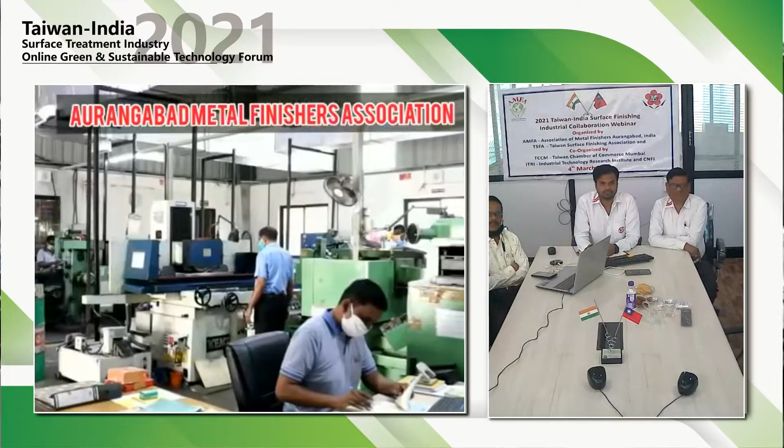The growth in the industrial sector in Aurangabad started in the mid-80s. It has continued till today, showing no signs of slowing down, with the prestigious DMIC project coming up in the Shendra-Bidkin industrial area, which has a land bank of over 10,000 acres. Thus, this is the ideal place to invest in, with the best of infrastructure maintaining a balance between nature and

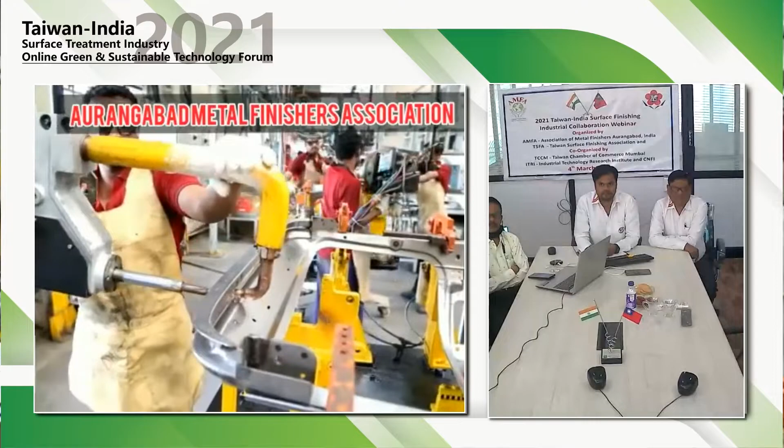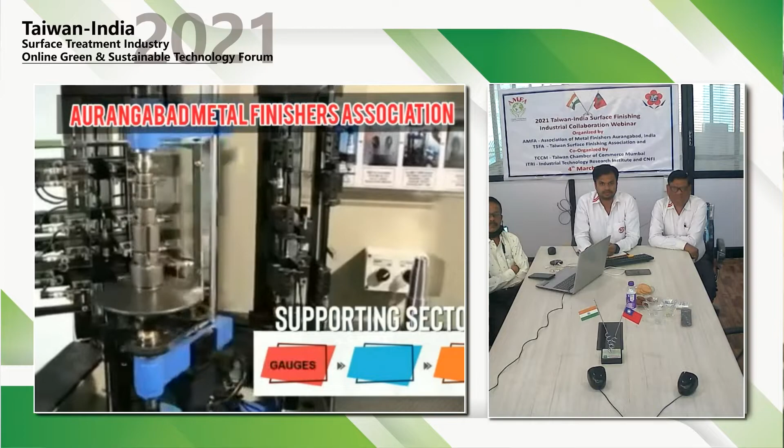industries. Today, this city is home to automobile sector giants and many well-known brands from the auto component sector. The supply chain is very well established with all Tier 1, 2 and 3 vendors keeping up with the best of industry trends and benchmarking, which helps them stay competitive. Almost all automobiles built in India have had some contribution from Aurangabad. The city is also host to well-known brands in the related supporting sectors like machines, SPMs, tools, gauges, fixtures and work holdings, etc.

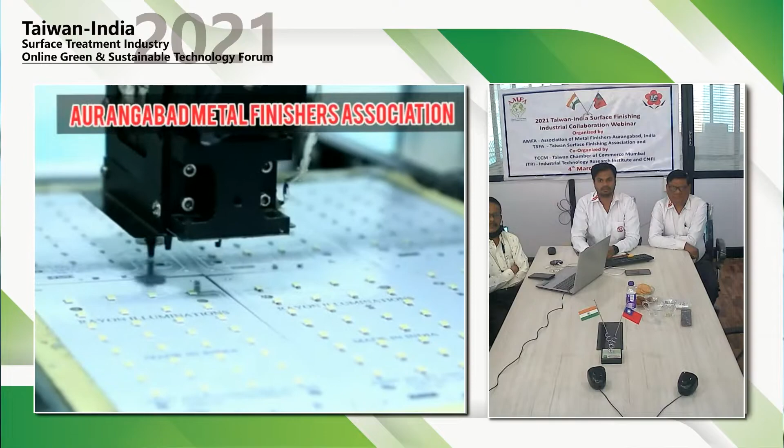Aurangabad is also home to many leading pharmaceutical companies, breweries, plastics, seeds, foods and consumer durables, along with new entrants in the field of IT and electronics. Now we move towards our association.

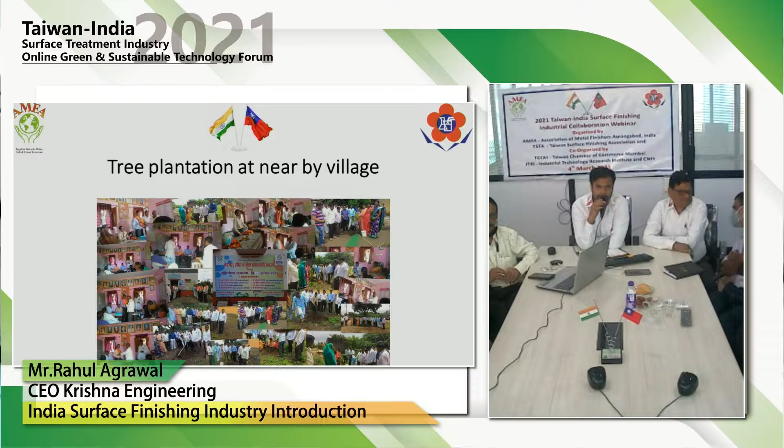We have done 106 tree plantations near our villages. Technical seminar by Growell, where we learn what next and what in future we can do in chemical industries. And also in this pandemic situation, we have contributed a handsome amount for relief. These are some of the moments from our first installation. Our ETP plant visit in Pune. A visit to the Growell R&D Center. Tree plantation near our village. Technical seminar by Growell India.

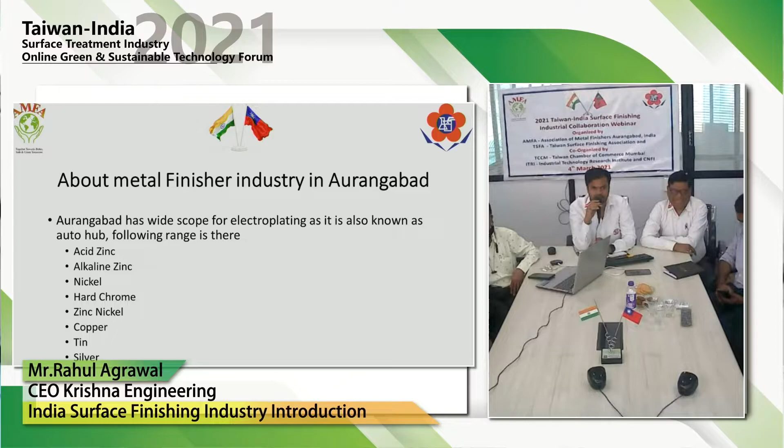Now, this is our metal finisher industry in Aurangabad. As we have 45 active members in our Aurangabad industries, these are the plating facilities which we have in Aurangabad: acid zinc, alkaline zinc, nickel chrome, hard chrome, zinc nickel, copper, tin, silver, and many others.

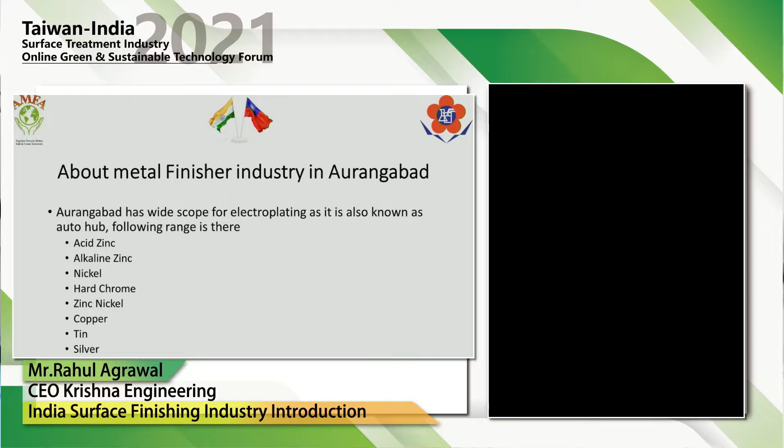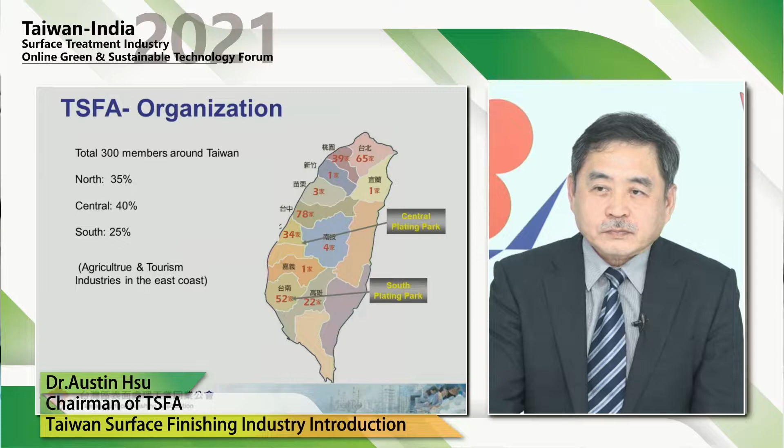Currently, we have 300 members around Taiwan, about 35% located in the north, about 40% in central Taiwan, and about 25% in the south. Because of geographical factors, on the East Coast we mainly have only agriculture and tourism. And here is our organization. This is a nationwide association. We have 4 offices around the island in order to provide service to our members and to communicate between members, industry, and government.

Our vision is to help our industry to become one of the top leaders in process and material application in surface treatment technology. And this will be beneficial to all the human and environment. Our mission is to support our industry to grow and improve continuously and help to become the best service provider to the world.

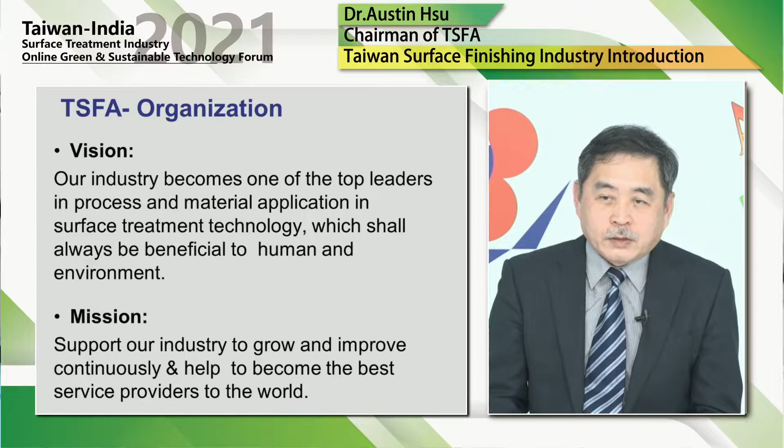I will summarize TSFA's role in this slide. You can see the interaction among members, TSFA and the government. We provide service to our members and support them to promote their technology or business. We organize exhibitions, forums, and education programs. And every year we collect consensus of the industry to provide to government for their policy decision. So this is the main role of our TSFA.

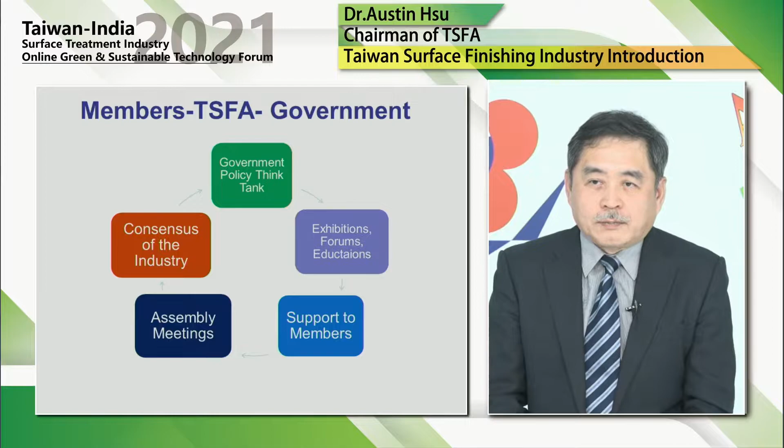Next, I will brief the current status of our surface finishing industry in Taiwan. First, the average revenue of the surface finishing industry is about 30 billion NT every year. And around the island, the total employees engaged in this industry is about, no, it's about 31,370, I think.

And we have total 1,400 shops around Taiwan. Most of our members provide process to their customer, and this we call process value added service. And the customers are directly from Taiwan, so about 90% of the customers are domestic. And from the scope point of view, most of the plating shops are small or medium operations.

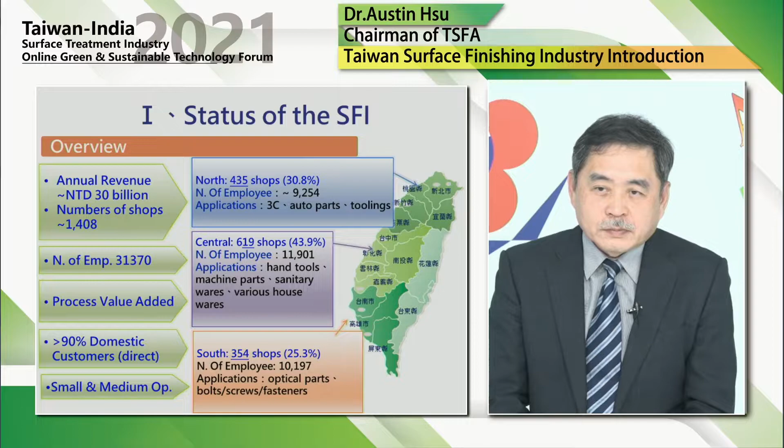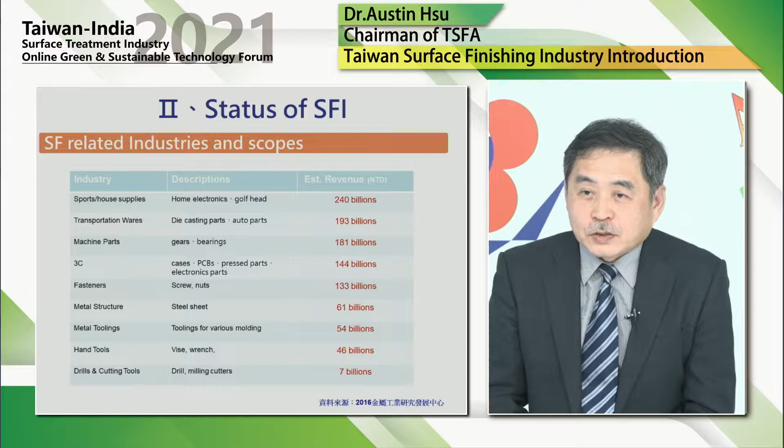We summarize the features of Taiwan surface finishing industry as the following. First, most of the operations are small or medium. Most of the platers provide only service without integrated complete products. When we visit the plating shops, we find the engineers are very skillful in providing what the customer demands. When a customer comes to the plating shop, the engineer can always design and rearrange the plating parameters or manufacture different kinds of plating machines to meet the customer requests.

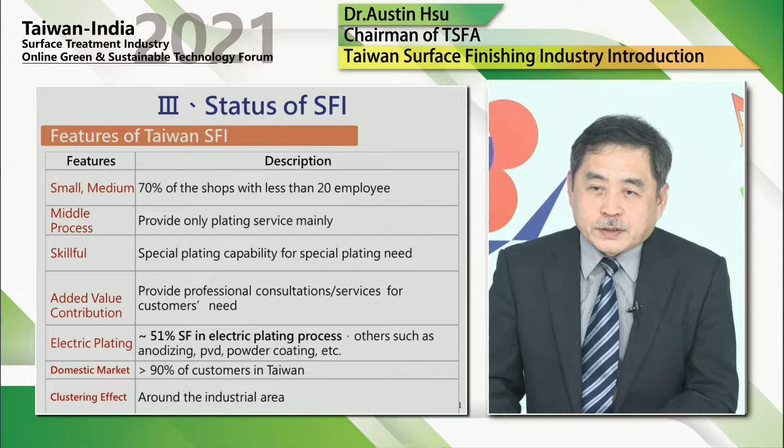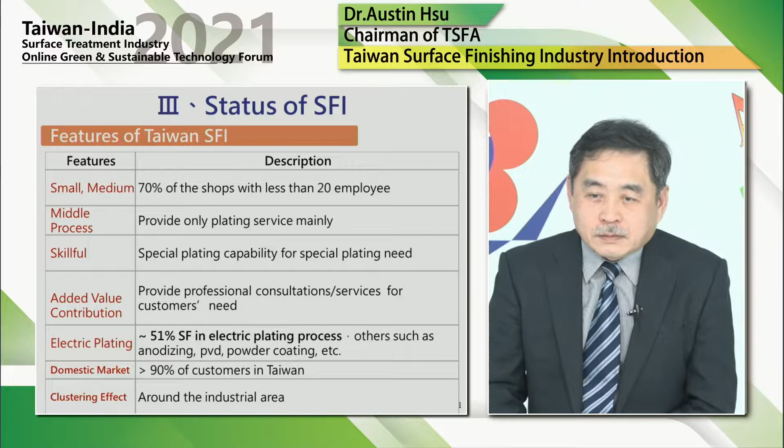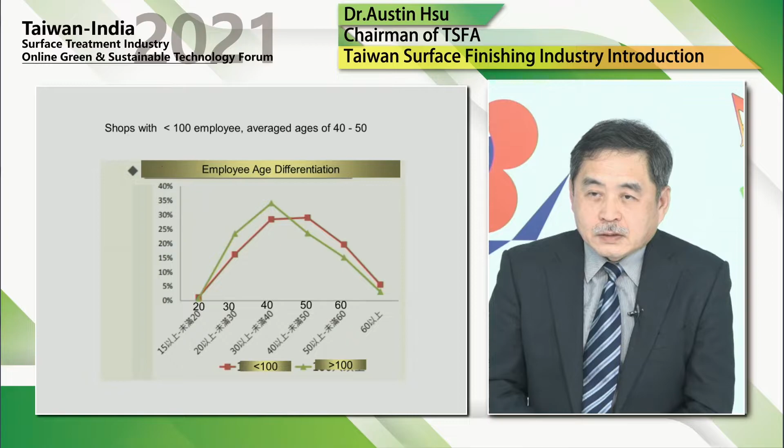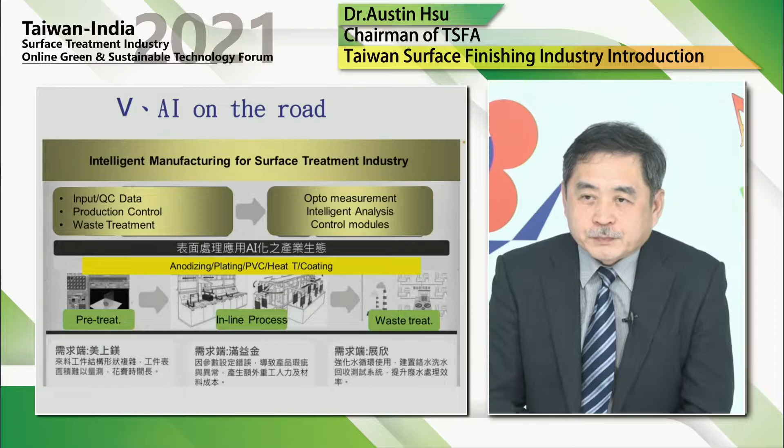So I really cherish our new relationship with EMFA. I believe we can work together to achieve these new goals. Thank you very much.

Okay, thank you, Dr. Hsu. Thanks for the very informative sharing. And next is a video from Mr. Brandon Lloyd. He's a Global Product Manager of Atotech. He will share with us about sustainable cleaning and degreasing.

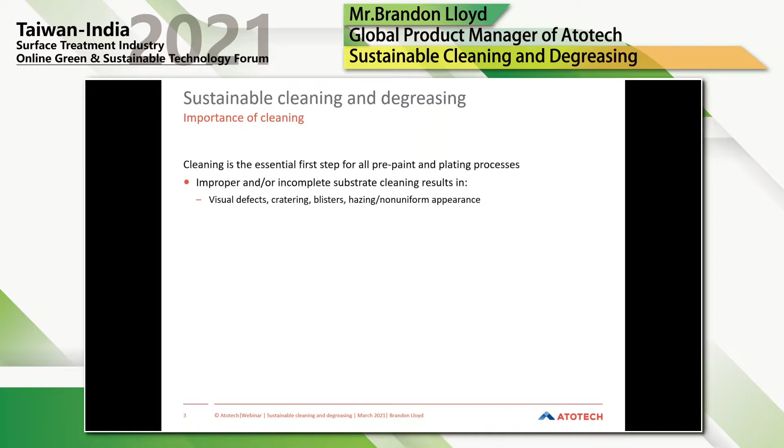So to start, let's first focus on the importance of cleaning. Cleaning is really the essential first step for all pre-paint and plating processes. Improper or incomplete substrate cleaning can result in the following issues: visual defects such as cratering, blisters, hazing or non-uniform appearance, whether we're considering painted parts or plated parts.

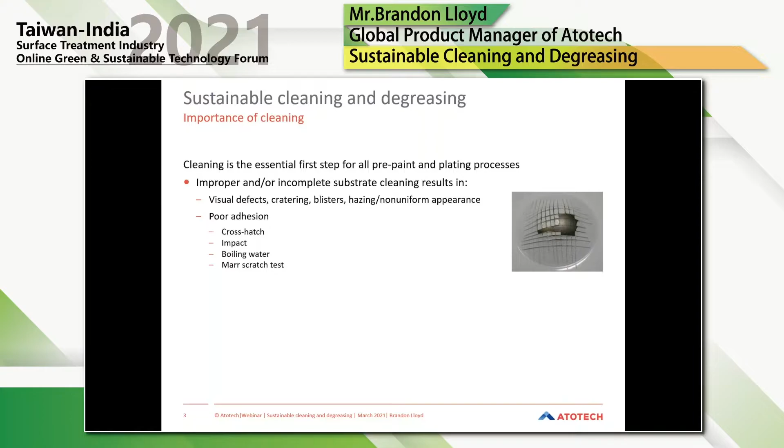Poor adhesion, through crosshatch, impact, boiling water, mar scratch tests, or any number of other tests as well. It can also result in poor corrosion resistance. Here we consider normal tests like salt spray, whether it's NSS or CASS, cyclic corrosion evaluations, and filiform tests. And these rejects lead to costly rework and production inefficiencies.

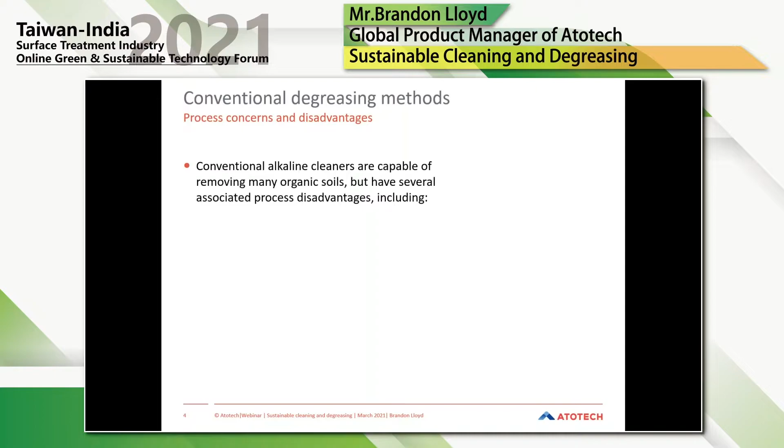So some of the process concerns and disadvantages of conventional degreasing methods. Conventional alkaline cleaners are capable of removing many organic soils, but have several associated disadvantages. They typically operate at high temperatures, somewhere between 55 to 80 degrees Celsius. What comes with that is a high associated energy cost. Additionally, it can have a high associated carbon footprint.

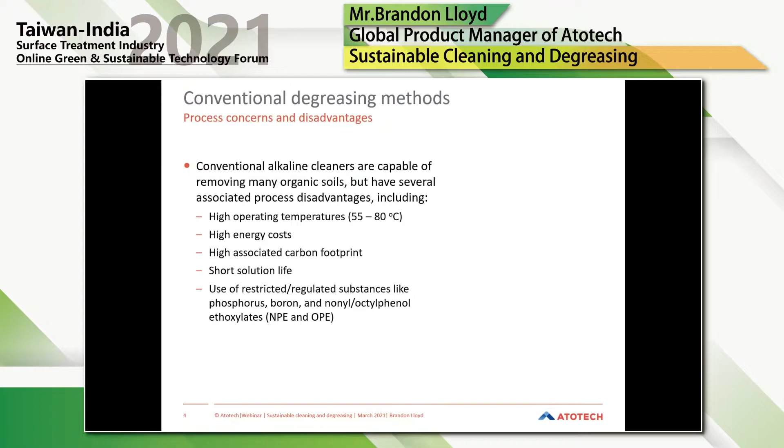The solution life is often relatively short, and sometimes they use restricted or regulated substances like phosphorus, boron, nonylphenol, and octylphenol ethoxylates. All of these substances have seen increasing regulation over the past few years, specifically in the EU, but we're starting to see a lot more around the world as well. As the organic soils are removed from the substrate surface, they become emulsified in solution, leading to a gradual decrease in cleaning performance until the solution must be replaced.

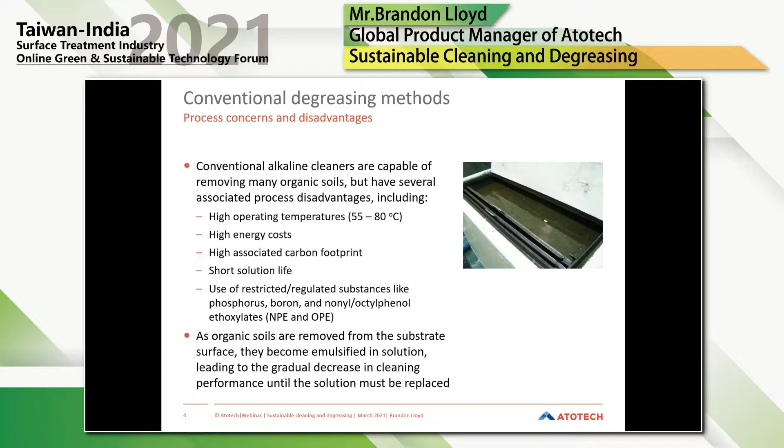So now we'll talk about some of the improvements to conventional degreasing methods that are available today. Atotech's approach to improving conventional degreasing methods really comes down to two important factors, long life and low temperature. First, we'll focus on long life aspects.

Some of the advantages that this offers is a stable cleaning performance throughout the usable life of the cleaner, and less frequent cleaner makeups, which have several associated advantages. There's chemical savings, reduction in waste, labor savings, meaning that there's less maintenance required, and so less time is dedicated to the tank dumps and maintenance of the system itself, and then an increase in overall plant productivity.

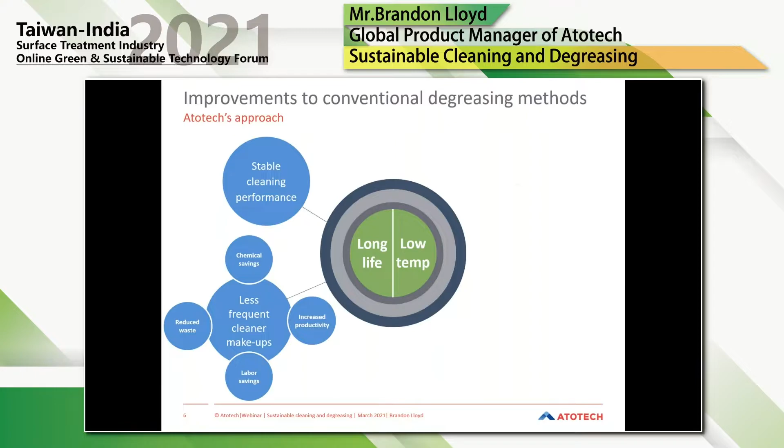Now, if we focus on the low temperature aspects, one of the primary benefits, of course, is energy savings. There's also the reduction in emissions. And lastly, it's offering a safer work environment for employees, especially when we're considering chemistry that is using less regulated substances and also operating at lower temperatures.

So, process description of Uniprep long life, low temperature cleaners. The Uniprep cleaners are specifically formulated to function at low operating temperatures. The part is degreased utilizing a cleaner with a highly emulsifying surfactant system. These emulsified oils are then degraded in situ, meaning inside the cleaner system itself.

The surfactant molecules that have helped emulsify the oils are then made available to emulsify additional oil introduced through the cleaning process, resulting in this long life cleaning system. The degradation of the emulsified oils occurs continuously over time and is really one of the unique advantages of Uniprep long life, low temperature cleaners.

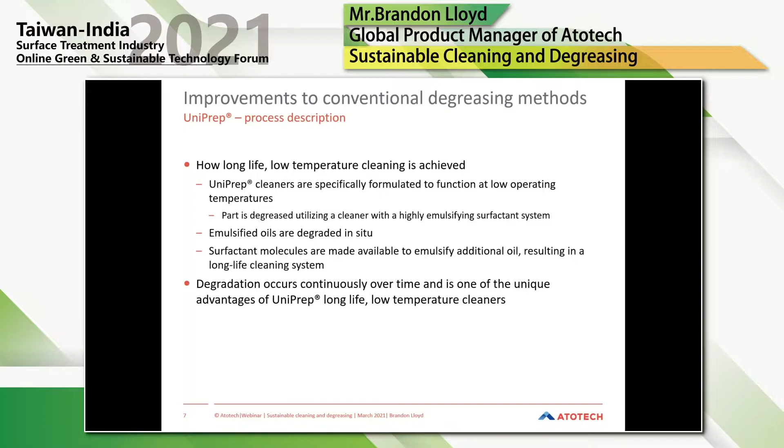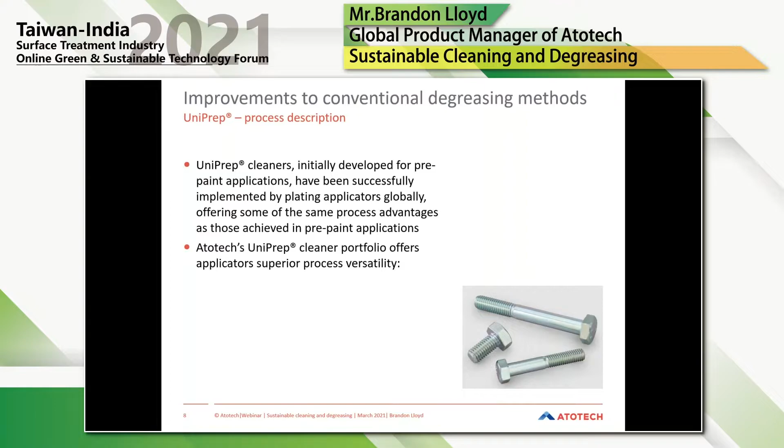Uniprep cleaners were initially developed for pre-paint applications, but have been successfully implemented by plating applicators globally, offering some of the same process advantages as those achieved in pre-paint applications. Atotech's Uniprep cleaner portfolio offers applicators superior process versatility. These specialized cleaners were developed for both spray and/or immersion applications.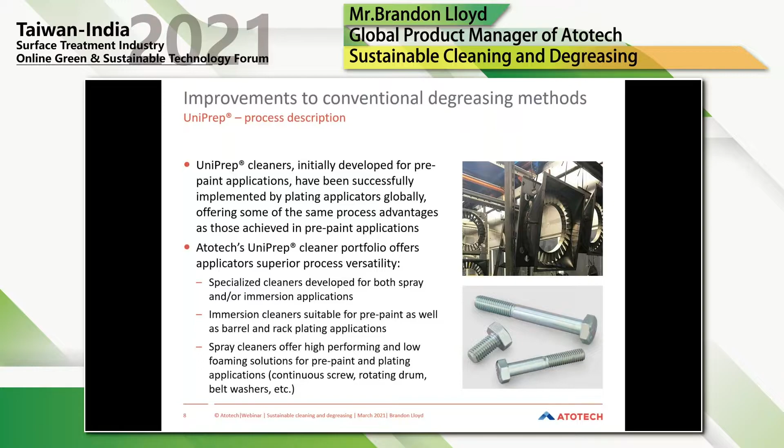The immersion cleaners are suitable for pre-paint as well as barrel and rack plating applications. Our spray cleaners offer high-performing and low-foaming solutions for pre-paint and plating applications. For plating applications that would require spray cleaners, we consider systems like continuous screw, rotating drum, belt washers, and any other number of spray systems utilized by plating applicators today.

So now we'll focus on some of the process benefits. The low operating temperatures result in substantial energy savings. In some of the following slides, we'll discuss some of the economics of this. The long life benefits of UniPrep cleaners and degreasers include increased productivity, waste treatment savings, reduction in COD and FOG, which is important for wastewater treatment operations and effluent, chemical consumption and cost savings.

We typically see in greater than 98% of our applications that the UniPrep cleaners are able to achieve a 2 times bath life extension in comparison to conventional cleaning. However, many of our customers have realized a 3-time or 4-time increase in cleaner life compared to conventional cleaners, and sometimes even more, which we'll discuss later. Lastly, it's supporting the maintenance of stable performance throughout the cleaner life, providing consistent results while minimizing the possibility for part rejects.

If we consider a conventional cleaner, the performance decreases as a function of the emulsified oil content in the solution. If we look at the diagram at the bottom of the slide, you can see that over time, as the amount of oil increases, the cleaning performance will gradually decrease, finally to a point where you must dump the cleaner and replace it. And then the cycle is just replicated over and over.

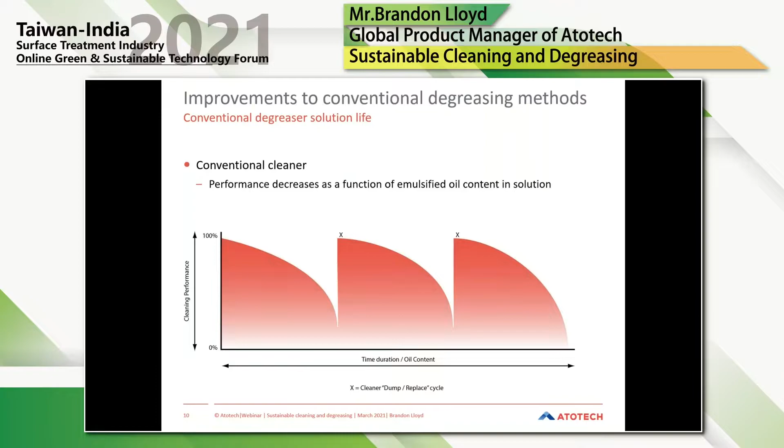If we consider UniPrep long life low temperature cleaners, the performance is going to remain consistent throughout the cleaner life due to the degradation of emulsified oils. Of course, there will be some gradual decrease as the oil content starts to increase slightly in the cleaning solution, but what we see typically is the cleaning performance is quite stable throughout the entire usable life.

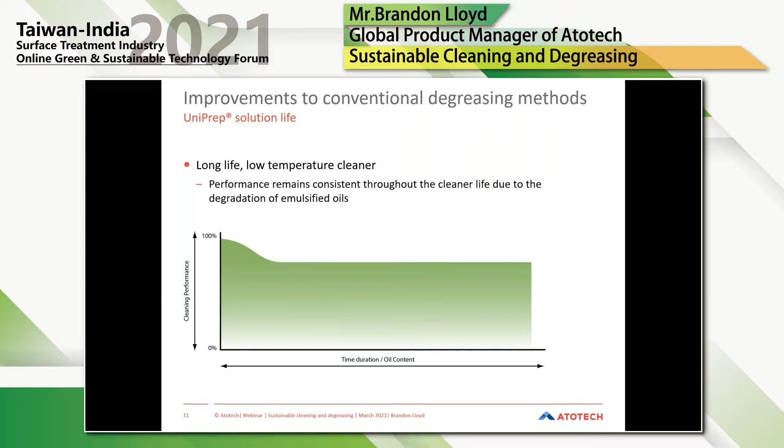We've conducted controlled laboratory experiments to show how oil levels can be reduced by as much as 7 times in our UniPrep cleaners. If we look at the diagram, the image on the left shows 2 graduated cylinders. The one on the left is a conventional cleaner, and you can see the oil that has separated out from the cleaner itself. For the UniPrep cleaner, the graduated cylinder on the right, the amount of oil is significantly decreased.

Another way to visually see this is with the 2 images on the right side of the page. The conventional cleaner shows the oil sitting on the surface of the cleaner tank itself. With the UniPrep cleaner, the amount of oil is significantly reduced compared to the conventional cleaner.

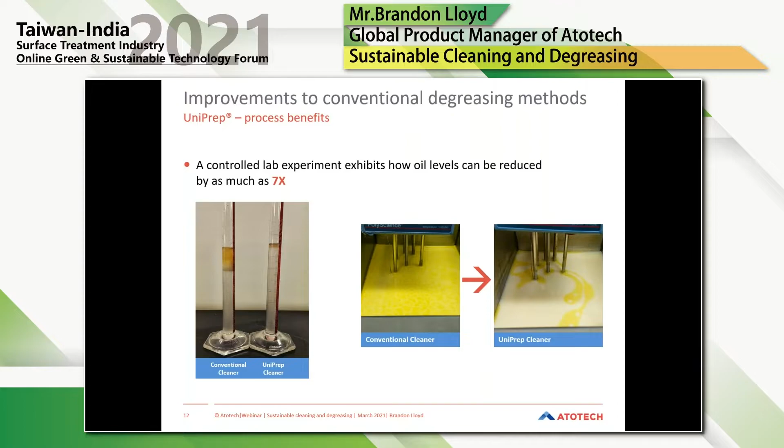Now we'll discuss some cleaning quantification tools. A key component of long life, low temperature cleaning is being able to quantify that adequate substrate cleanliness is being achieved, both prior to and after implementation of the process in production. There are several simplistic methods like white glove or white tissue tests, as well as water break tests that can give you some indication of substrate cleanliness. The images on the right side of the slide exhibit these specific tests.

If we consider some of the advantages of these tests: first, they're non-destructive, so they can be conducted on production parts. They're very easy to conduct and relatively inexpensive. The disadvantages, however, are that the results cannot be quantified - it's really only a visual inspection. They are dependent on the inspection quality and the inspection personnel's skill.

For certain pre-paint and plating applications, a more sophisticated evaluation is really required to ensure that the subsequent coating is not compromised. Going back to the first slide where we talked about the importance of cleaning, this is really the key first step in ensuring your final part quality.

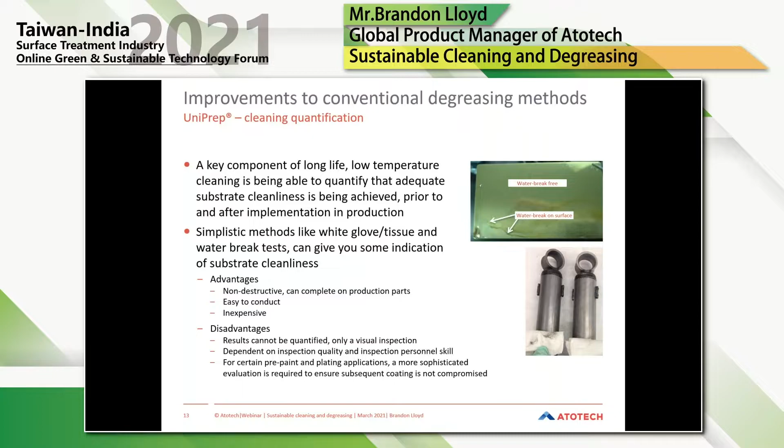Some of the more sophisticated methods aid in cleaning quantification better than the previously mentioned conventional methods. We have 3 specific methods that we consider within Atotech as we evaluate cleaners and degreasers. The first is auto deposition copper immersion.

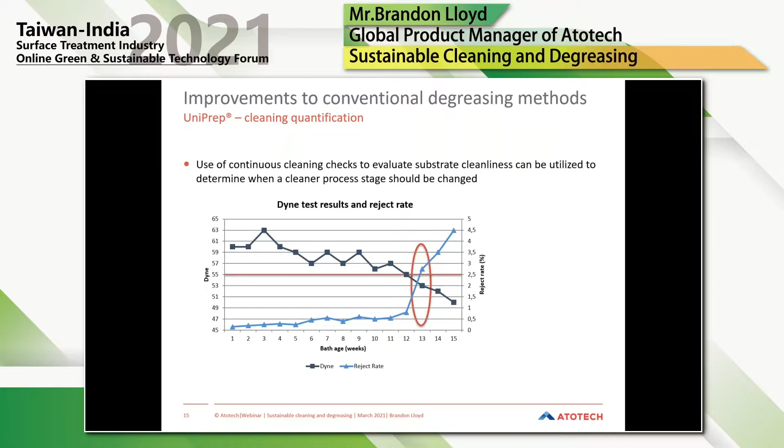Now let's talk about some of the economics of sustainable cleaning processes. So if we consider a conventional degreaser versus UniPrep long life, low temperature cleaning, in this application specifically we're going to focus on a spray cleaning application for pre-paint.

The customer is utilizing a 20,000 liter degreasing tank, using a natural gas boiler for heating the process stage, and their production volume is approximately 750,000 square meters per month.

For the conventional degreaser, the unit cost is X US dollars per kg, operated at 5% concentration, 55 degrees Celsius, with typically about a 20-day bath life. For the UniPrep cleaner, this has a slightly higher unit cost at 1.5x US dollars per kg, but is operated at 3% concentration compared to 5%, at a lower temperature of 35 degrees Celsius versus 55, and the bath life goes from 20 days up to 120 days, quite a big extension.

Looking at overall process benefits, first the chemical cost: with the conventional degreaser, the overall annual cost is about $200,000 per year. With the UniPrep cleaning process, this cost is only about $189,000 per year, offering a 5% savings, even though the UniPrep cleaner has a higher unit cost.

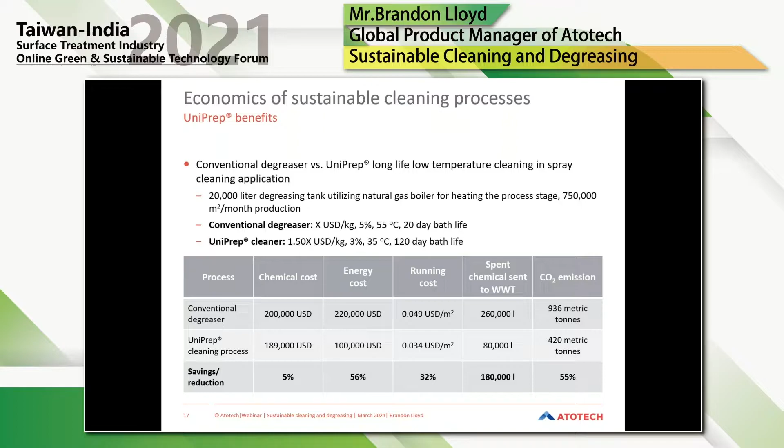So lastly, we'll go over some case studies. Case study 1 is an existing Atotech customer that has implemented UniPrep long life, low temperature cleaners into each of their 4 lines. The primary benefits they were looking to achieve were reduction in overall chemical consumption, process improvements in final part quality, and sustainability initiatives.

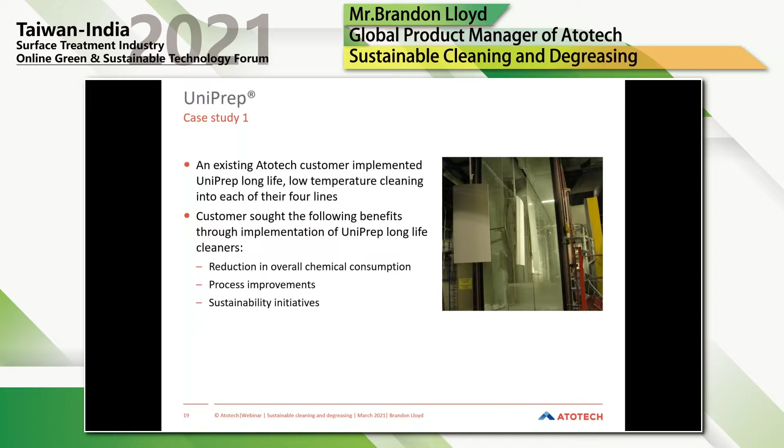With UniPrep implementation, they were able to significantly increase the bath life. We can see that in almost every instance, we were able to increase it by 2x. The total number of cleaner makeups eliminated annually was 14. In summary, there's a 128% cleaner life extension for all of the lines combined, and an 18% reduction in the daily cleaner replenishments. This is quite a big benefit in supporting reduced overall operating costs.

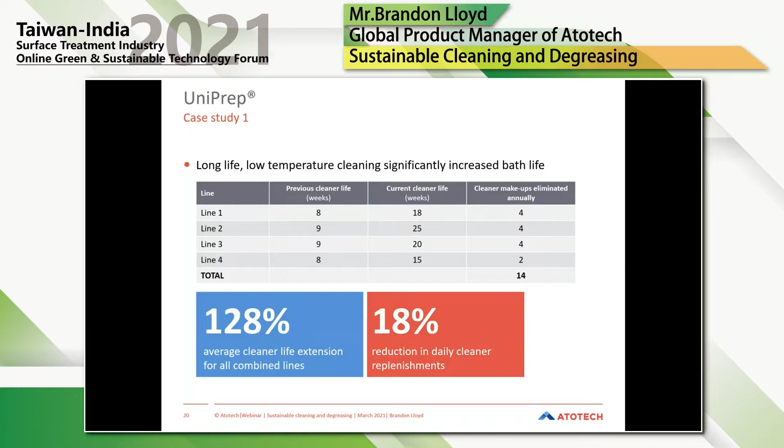In summary of the total benefits: from the cleaner dumps itself, the customer achieved about $28,000 US per year in savings. The daily cleaner replenishments reduced overall cost by almost $200,000 US per year. Additional benefits were achieved through energy savings, almost $45,000 US per year. Reduction in labor was attributed to $10,000 US per year. CO2 emissions were reduced by greater than 440 metric tons per year, and filter cleaning was also a key benefit, reduced by 65%. The total annual savings achieved through this customer was greater than $270,000 US dollars.

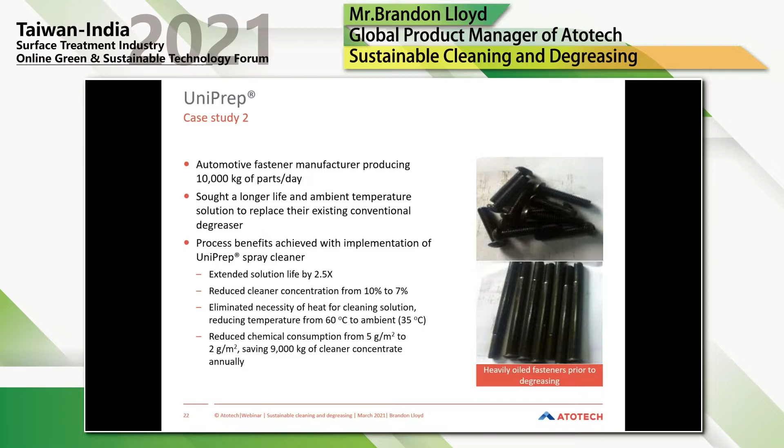Another case study I want to discuss is an automotive fastener manufacturer producing about 10,000 kilograms of parts per day. They were seeking a longer life, ambient temperature solution to replace their existing conventional degreaser. The process benefits achieved with implementation of UniPrep were: extended solution life by about 2.5 times, reduced cleaner concentration from 10% to 7%, eliminated the necessity of heat for the cleaning solution, reducing temperatures from 60 degrees C down to 35 degrees Celsius, and reduced chemical consumption from 5 grams per square meter to 2 grams per square meter, saving almost 9,000 kgs of cleaner concentrate annually.

Lastly, we'd like to highlight some of the other applications we've seen globally in plating with significant improvement in bath life through implementation of UniPrep cleaners. If we look at the table here, we can see many different examples.

The first one we see is an alkaline zinc nickel rack plating application that is able to extend their bath life by 4x.

The third instance is an electroless nickel rack plating application with a much smaller tank volume, which was able to achieve at least 2x. This can be extended even further since this installation only took place within the last year.

The last one we'll discuss is the acid zinc rack plating application. With a tank volume of 5 cubic meters, we were able to achieve a 20x bath life extension.

So we can see that in every application, what UniPrep offers the customer can be quite different. These customers, as a collective, serving multiple industries including automotive, fasteners, and general industry, have attributed many savings and process improvements to the implementation of UniPrep, including fewer rejects and longer bath life of other chemical stages.

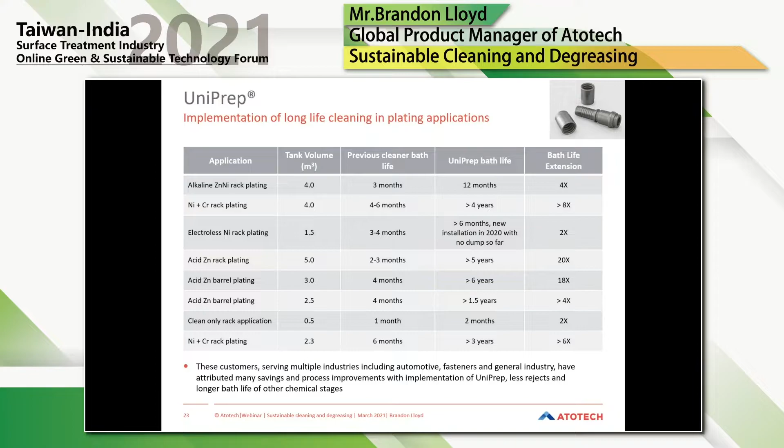So in summary, long life, low temperature cleaning processes can increase the overall sustainability of the pretreatment process, offering lower operating temperatures, longer solution life, increased total process savings, and stable operating conditions.

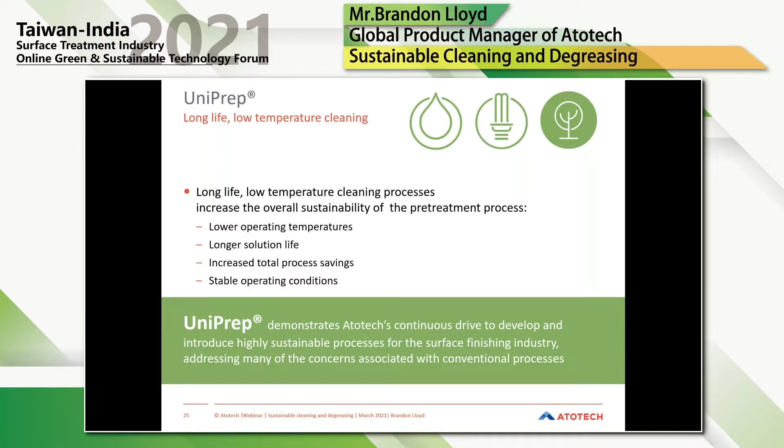As a collective, UniPrep demonstrates Atotech's continuous drive to develop and introduce highly sustainable processes for the surface finishing industry, addressing many of the concerns typically associated with conventional processes.

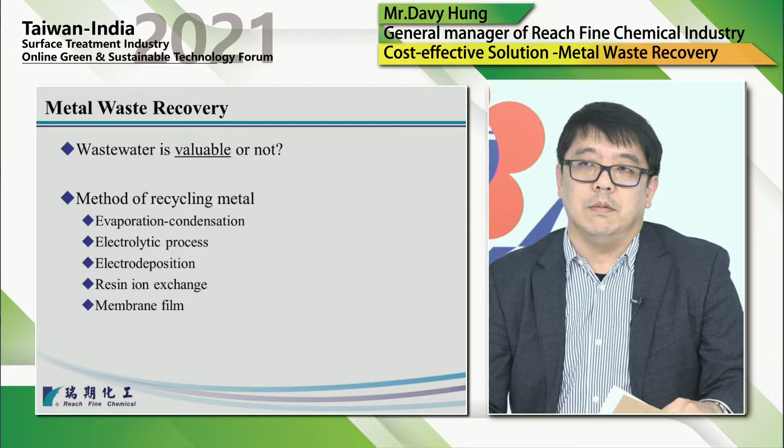The final one is the membrane film. This is mainly to recycle water first, and then you can get a metal concentrate and get it back for use in your plating line. So these 5 are the most popular common ways used in plating shops.

And then I'll go over our own system about recovering nickel. Our system is using ion exchange resin. And we chose these technologies because we want to selectively recover nickel from the plating line, and also we can recycle the water back to the line to use.

So we started to think either we can treat the wastewater or we can find a resource from the wastewater. So we chose to treat the rinsing water after the nickel tank, so we can get the nickel back into nickel sulfate solution. We can get about 99% of nickel recycled as nickel sulfate solution.

And because nickel can be isolated, water can also be recycled. About 85% of water can be recycled and back to the line. And it also can decrease the wastewater discharge.

And here, because we use ion exchange, I'll just briefly explain the mechanism. Here we select a special resin which has very high selectivity to nickel. So there are 3 reactions. The first, we call it adsorb. We use a sodium type of resin to absorb nickel, and then get the nickel type resin. And then we use sulfuric acid to go over the resin and then get the nickel sulfate solution.

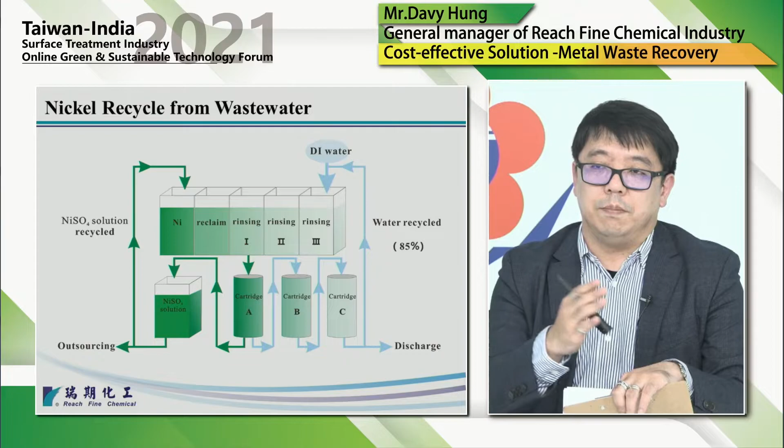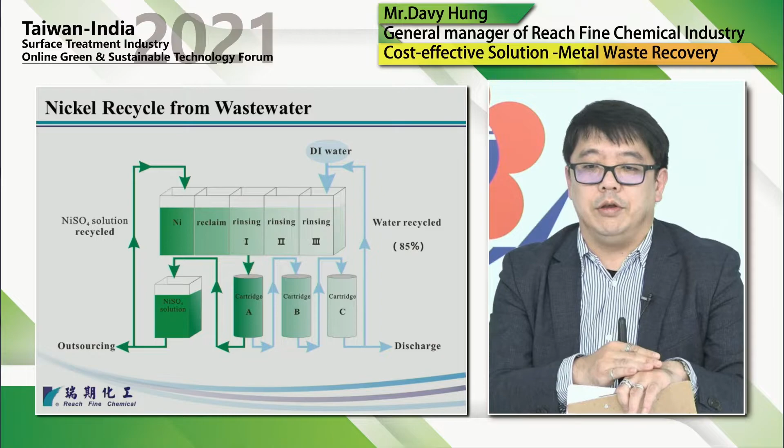So as a result, we get nickel sulfate solution and recycled water. On the left-hand side, we have the nickel sulfate solution, which you can use back in the plating line. Usually, we put it into a semi-bright nickel tank. On the right-hand side, we have water to recycle, usually used back in your plating line. Some plating shops use it back as rinsing water, or to make up the cleaner or post-treatment, and about 15% of water goes to discharge.

And here, our performance for this equipment is we can get very good quality of the nickel sulfate solution, about 260 grams per liter of concentration. So it's almost ready to use.

And then the water is good quality and can be used back either for your rinsing water or for makeup for cleaner. And also for wastewater, you can have very low content of nickel. For a few of our customers, we measured the nickel content in their wastewater after the nickel recycling process. The average is below 0.5 ppm, so it meets the regulations in most countries right now.

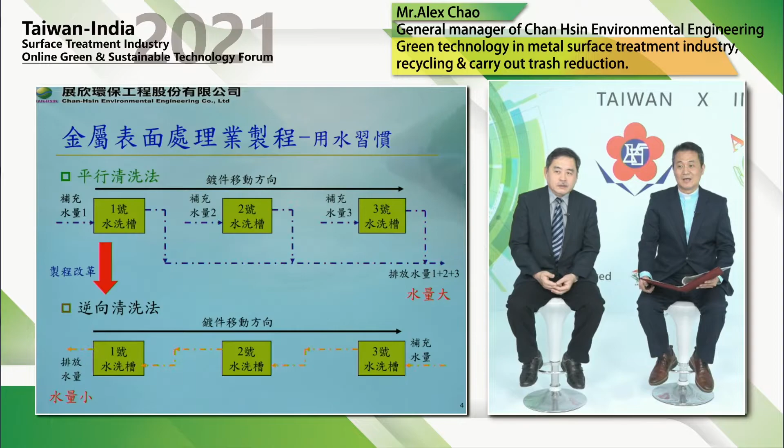Traditionally, in the cleaning process, the cleaning flow is parallel to the processing flow, so you input rinsing water from the beginning and follow through to the end. We call this parallel rinsing. This way generates a huge amount of wastewater.

And here we propose a new method of rinsing. We call it reverse rinsing, which inputs water from the back end to the front. This way, you can reduce a big amount of wastewater.

And in practical application, we evaluated that every year, if you use reverse rinsing, you can save about 16,500 tons of water per year, and you save almost 1 million NT per year.

Generally, you have cyanide wastewater, chromic acid wastewater, and other plating chemical wastewater. If you can separate these sources into different pipes, you can have easier treatment and better management of the wastewater.

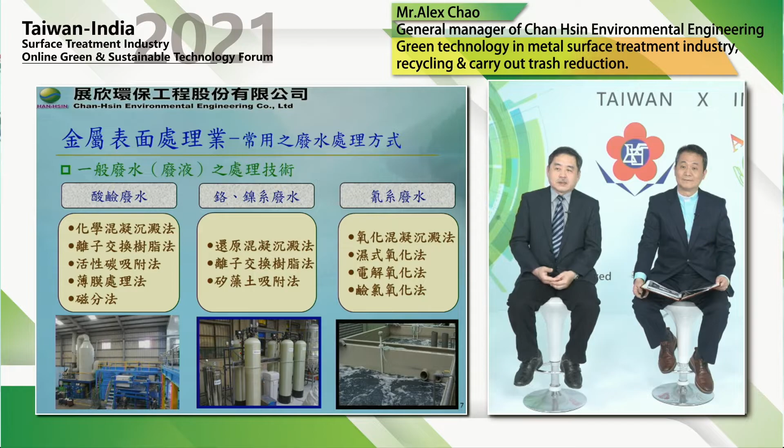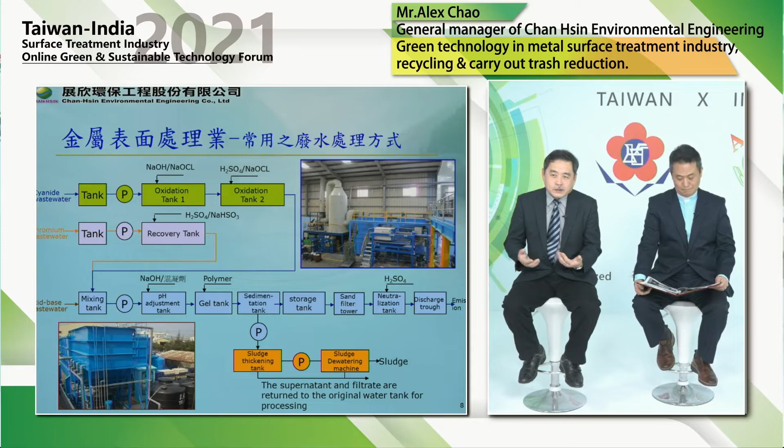Okay. Cyanide waste usually goes through two processes, first oxidation and second oxidation. Then after the final step, you have mixed solid waste, and you need to contract this out for outside treatment.

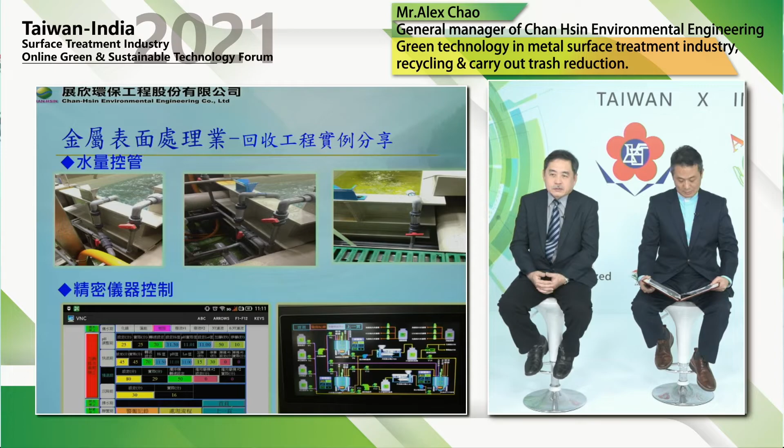We also develop a nitrogen ammonium waste recycle system, and if you are interested, we can provide information to you.

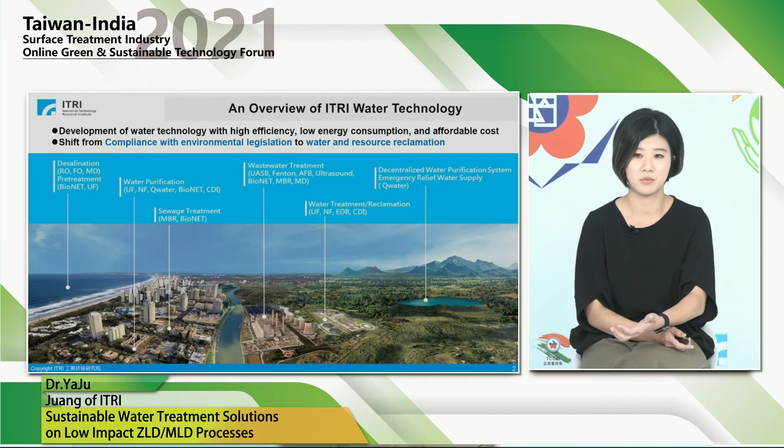Let me briefly introduce ITRI's water technology. ITRI's water technology has developed a set of water technologies with high efficiency, low energy consumption and affordable prices. In recent years, the aim of ITRI's water team has changed from compliance with environmental legislation to water and resource reclamation. From this picture, we can see that ITRI's technology can be applied from upstream to downstream, such as seawater desalination, industrial wastewater treatment and reclamation, municipal water treatment, as well as decentralized wastewater treatment.

ITRI has a variety of technologies, such as biological, physical chemical processes, as well as advanced processes and sludge reduction. All of these technologies we already apply in many fields, like fermentation, dye, textile, the metal surface industry, papers, leathers, and some high technologies. So ITRI's water team shows capability in systematic design, engineering design, as well as the integration of competitive water solutions.

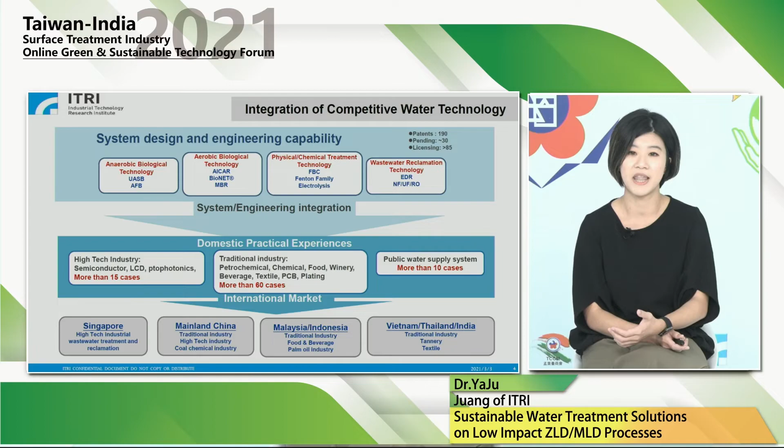And not only in domestic practice, such as high-tech, traditional industry, as well as government projects. We also have many cases and many clients around the world, like Singapore, mainland China, Indonesia, as well as India. So first let me talk about the low-impact wastewater treatment for the metal surface treatment industry.

The metal surface finish industry is comprised of a large variety of activities, and the purposes are mainly focused on the treatment of the metal surface, corrosion protection, improving the resistance to wear and erosion, as well as appearance enhancement with metallic coatings. All of these activities are divided into two main treatment categories. The first is the cleaning process and surface pretreatment, such as alkaline cleaning and some other processes. The second stage is the metallic coating and surface finish, like electroplating, electroless plating, anodization, as well as chromate conversion.

From these processes, a large amount of wastewater with diverse composition will be produced. As we know, the wastewater treatment process mainly depends on the composition of the effluent, the environmental need or the objective of each company. In some places the company has to meet the requirement of zero liquid discharge, or some companies would like to increase the water recovery rate or adjust the wastewater effluent until they meet the effluent standards.

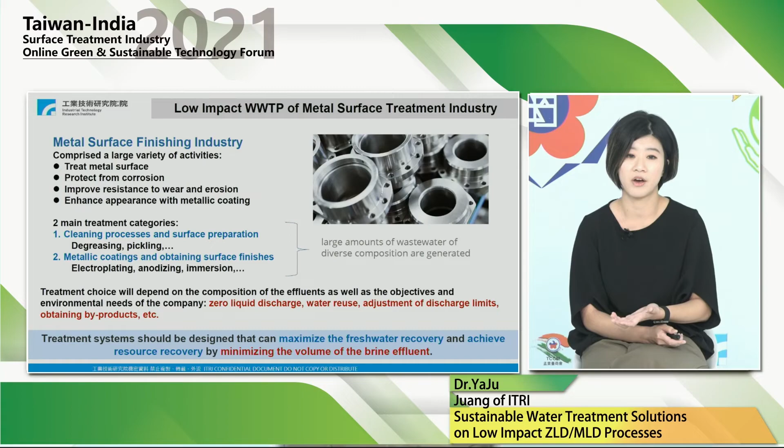So to achieve low impact wastewater treatment, the treatment system has to be designed for maximizing freshwater recovery. It means that we have to increase the recovery rate or reduce the volume of the brine or the final waste disposal products. This slide shows the general metal finish process. The first stage is the preparation, the pretreatment of the surface, and the second stage is the surface treatment.

All of the processes produce large amounts of waste, from the rinse water effluent from the plating baths, some of it from surfactants or strippers. Unfortunately, most of it is non-biodegradable because it consists of persistent bioaccumulative toxic substances such as heavy metals, cadmium, chromium, and even cyanide. So the effluent always has a very high COD value, extreme pH values, high organic content, as well as high TDS. So let's talk about the water qualities.

I think in most of the process the inlet water quality plays an important role, not only in the final product qualities, but also in the recovery or the recycling technologies. So the elimination of the plating contaminants plays a very important role. And here I would like to suggest some pre-treatment processes for the inlet water quality.

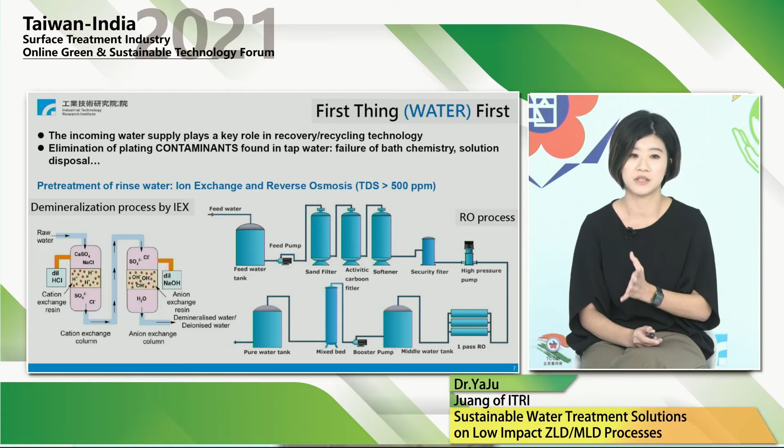Okay, and as for the recycling technology for metal surface treatment waste, we always say that by the combination of proper technology it is possible to accomplish zero liquid discharge to the following sewage or stream system. It means that we can try to reduce most of the waste to the environment.

So by applying the proper process, the finisher can have more profitable resource recovery, such as recovering the process solution and reusing it and sending it back to their tanks, or removing the pollutants or impurities from the process solution, which can largely extend the lifespan of your solutions, or recovering metals or valuable resources like heavy metals, which can be reused again or sent back to the supplier.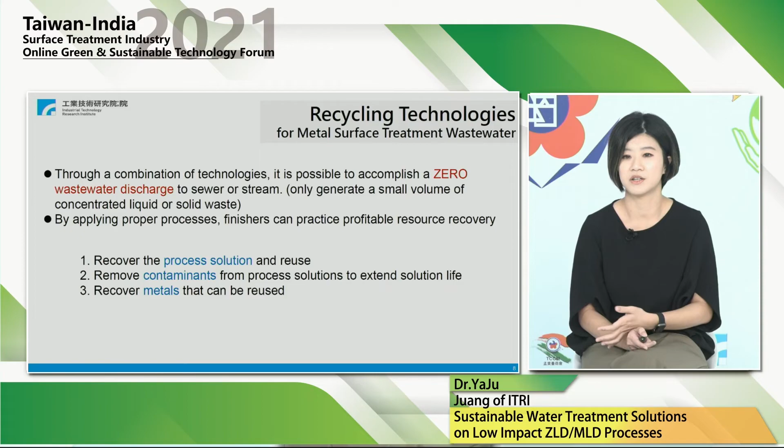So here I would like to share this process. As we know, in most wastewater treatment plants, the wastewater produced from the industrial sectors has to be first pre-treated by a physical or chemical process. And afterward, if you want to recycle the water, you have to buy a reclamation system like the membrane filtration process, such as the RO system and ultrafiltration. In this process, clean water will be produced. Meanwhile, a brine will also be produced, which has to be treated by the thermal process.

And as we know, the thermal process has very high OPEX. The operational expense is generally quite high, around more than $10 per cubic meter. So if we want to overcome this kind of issue, we have to think about brine reduction to reduce the need for the thermal system, as well as refractory organic decomposition.

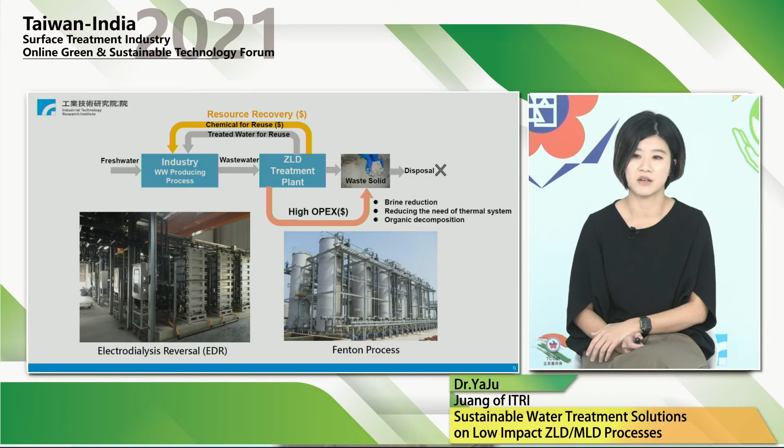So here I would like to suggest some low impact wastewater treatment processes. The first is electrodialysis reversal, which we call the EDR system. And the second one would be the Fenton process for organic decomposition. So the first is the ED or EDR technology. ED, which we call electrodialysis, is composed of electrical charge with selective membranes to separate ions from the solution. It means that we can get clean water, which is deionized.

And the EDR system, which we call electrodialysis reversal, is an advanced version of the ED system and can periodically reverse the polarity of the electrode. This can prevent the scaling or fouling of the membrane or the electrode system and extend the lifespan of the EDR system.

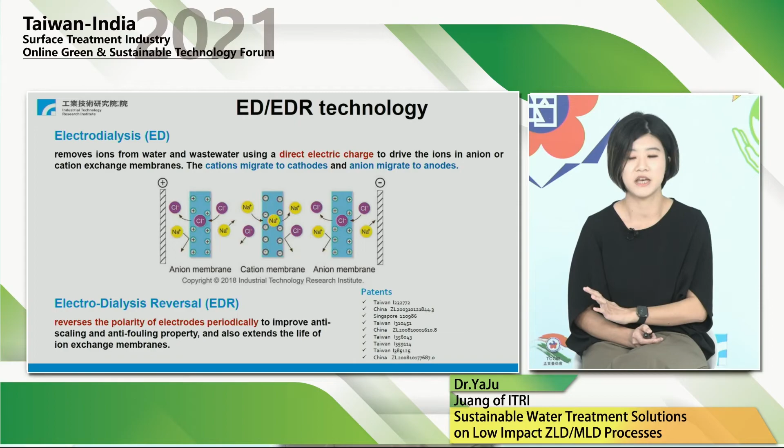Okay, so the EDR system shows some features like water softening without chemical addition, because we only separate the ions by electrical charge, so you can remove the ions from the solution. It is capable of treating lower grade effluent compared to the RO system, so it can be used for RO brine reconcentration to reduce the brine. Therefore we can obtain a much higher water recovery rate with high desalination efficiency.

So here is one of the cases we installed in an Indian CETP. This CETP is one of the zero liquid discharge CETPs. In this plant, they met an urgent issue about how to increase the water recovery rate, because the too high loading of the evaporator caused a lower recovery rate and high energy consumption. So in this case, we installed the EDR for treatment of the RO brine.

And after the installation, we can see that we can easily reduce the brine by at least 60%. It means that in the full-scale plant, we can save at least 3 crore rupees per year in the OPEX of the thermal system.

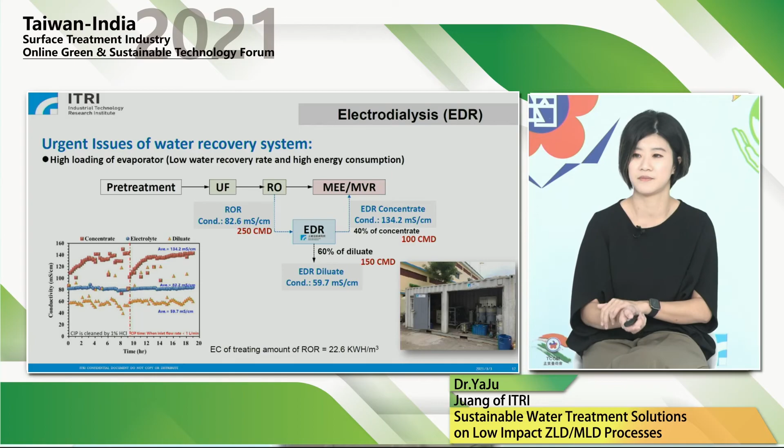The next technology I would like to share is the Fenton process, which can be applied to remove or decompose refractory organics. Fenton process, as we know, is an advanced oxidation process, a kind of AOP, which applies the Fenton reagent, hydrogen peroxide with ferrous iron, to generate OH radicals for organic decomposition.

Some people know that Fenton has made at least 4 kinds of series, and I would like to suggest 2 of them. The first is Fered-Fenton for high strength wastewater treatment, and the second is FBR Fenton for treating residual organics, for polishing the effluent water quality. The Fenton process shows features that enhance pollutant biodegradation rate and decolorization, with very small footprint and easy control.

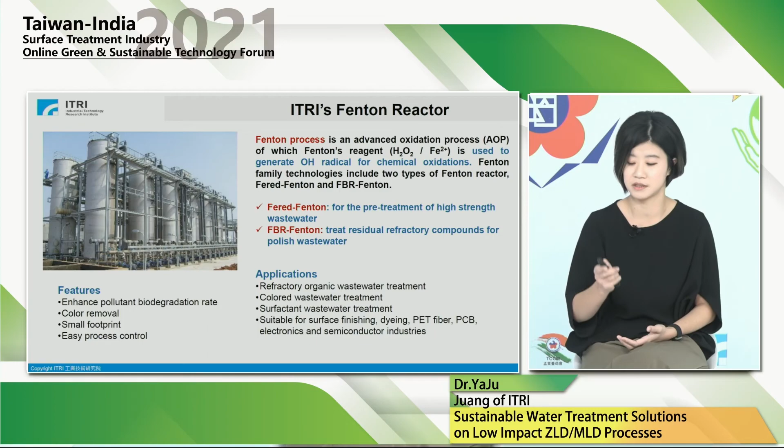Here I would like to make a brief summary of my presentation. The low impact water treatment process can be improved in many ways, like the previous speakers mentioned: use the least toxic or easiest way to manage the chemical, and extract the most used chemical or material and reuse them in the process, meaning keep the chemicals where they belong in each tank.

The second point is to use the least amount of wastewater for saving water. Due to many reasons like stricter environmental legislation, water scarcity issues, or the high OPEX of wastewater treatment, novel and proper technology for water management and treatment is an urgent issue.

If you want a more low impact water treatment process, there are 2 issues to consider. First, improve the reuse water quality with proper technology. Second, try to reduce the need for thermal systems, meaning you can use different reconcentration technology to reduce the brine and enhance the recovery rate of fresh water.